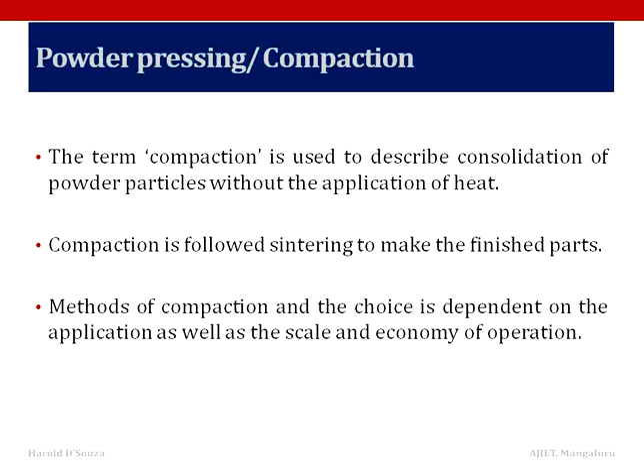Now, an alternative is to use low pressures and high binder content to shape the powder particles. The binder acts as a glue to hold the particles into the desired shape. Most binders are polymers, which might be mineral oil or polyethylene. In shaping, the porosity ranges from 40% to 60%, excluding the polymer.

Therefore, sintering is performed at temperatures where sufficient densification occurs. Fine powders assist in densification during sintering. Thus, key differences between compaction and shaping are in the forming pressure, initial porosity levels, particle sizes, and sintering temperatures. Compaction relies on high pressure and the resulting porosity is low, while in shaping it is the reverse.

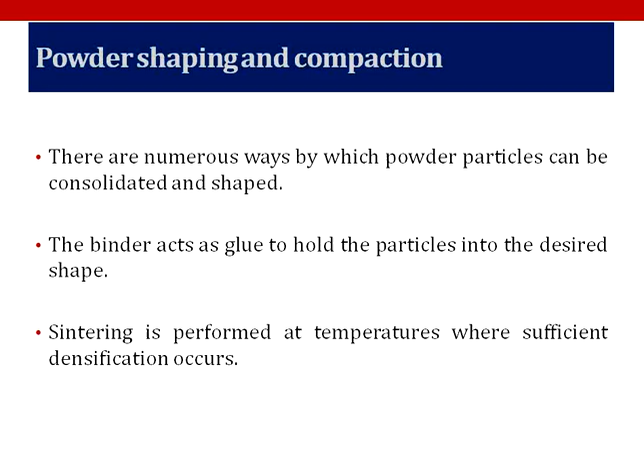The differences between the compaction and shaping technologies have an impact on the production costs. Important considerations are the component size, the desired final density, and shape complexity.

A general categorization of shaping technologies is as follows. Binder assisted extrusion: elongated parts, fine powders, constant cross section, relatively simple shapes. Second, injection molding: for complex or small components or high performance materials. Slip casting: for very large structures, constant wall thickness, and low precision. And tape casting, used for flat sheets, very simple shapes, and fine powders.

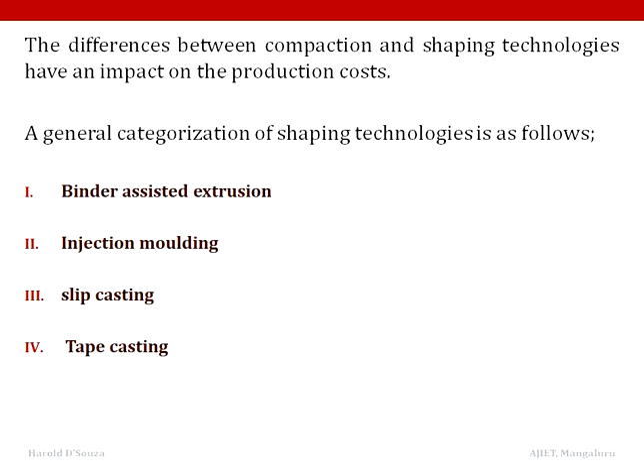Binders. A binder or binding agent is any material or substance that holds or draws other materials together to form a cohesive whole, mechanically, chemically, by adhesion or cohesion. The binder is mixed with the powder to form the feedstock. Most binders are multiple component mixtures that contain a major ingredient which provides the basic properties, along with additives used to obtain other desired properties.

As a primary requirement for easy shaping, the binder must wet the powder surface. Various chemicals are employed to improve the wetting between the powders and the binder. For ferrous alloys, the most common coupling chemicals are stearates, including stearic acid, zinc stearate, and ethylene bisstearamide. Of these, stearic acid is a low cost polar molecule having a density of 0.85 gram per centimeter cube and a melting temperature of 65 to 75 degrees centigrade.

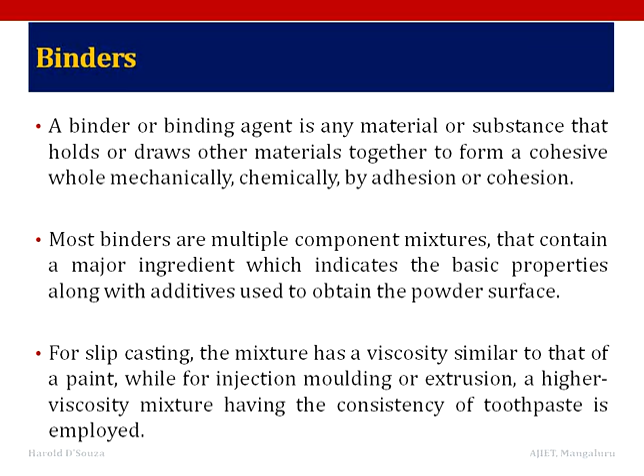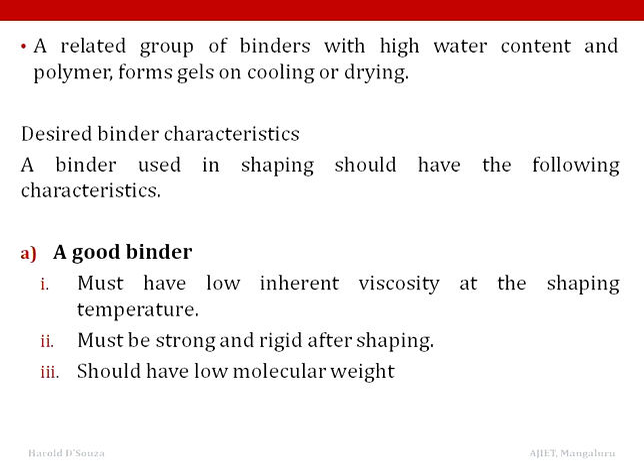The desired binder characteristics: a good binder must have a low inherent viscosity at the shaping temperature. It has to be strong and rigid after shaping, and it should also have a low molecular weight.

Second, powder interaction. With regard to powder interaction, a binder must wet and adhere to the powder. It has to be chemically passive and stable during mixing and shaping.

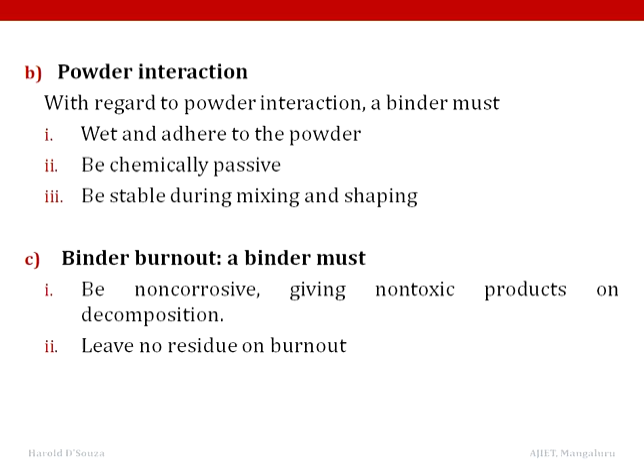And binder burnout: a binder must be non-corrosive, giving non-toxic products on decomposition, and it should leave no residue on burnout.

Compacting. The blended powders are pressed in dies under high pressure to form them into the required shape. The work part after compaction is called a green compact, or simply a green. The word green means not yet fully processed. Compaction is done to bring the finely divided particles of the powder into close proximity while imparting the desired part configuration.

The following methods are used or adopted for compacting: die pressing, centrifugal compacting, injection molding, extrusion, rolling, gravity sintering, slip casting, isostatic molding, and explosive molding.

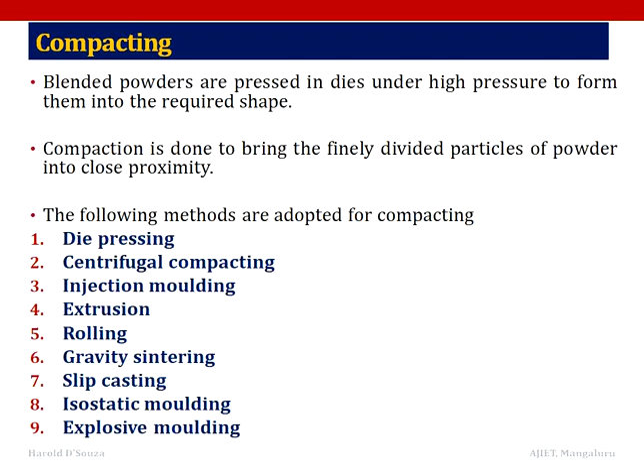Die pressing: the metal powders are placed in a die cavity and compressed to form a component shaped to the contour of the die. The pressure used for producing the green compact of the component varies from 80 megapascals to around 1400 megapascals.

Depending upon the material and characteristics of the powder used, mechanical presses are used for compacting objects at low pressure, while hydraulic presses are used for compacting objects at higher pressure.

The basic components are: the hydraulic mechanism, to apply the pressure; a die which has adequate strength with a cavity of the desired shape and dimension; a feeding device to fill the die cavity; the upper and lower punches to apply the pressure and assist in ejection of the green compact; and a control system to maintain the magnitude of pressure and the rate of pressure application.

Single action die compaction is used to manufacture flat thin parts such as washers, discs, and thin rings. The lower punch is stationary during the application of pressure by motion of the upper punch, acting from one direction only on the powder placed in the cavity.

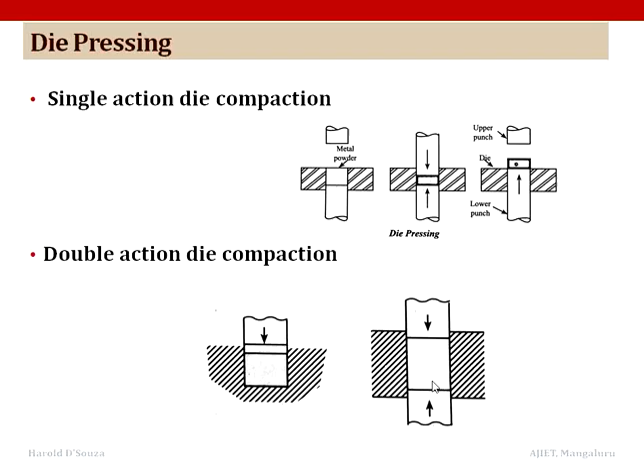Next, double action die compaction: here the powder is compacted simultaneously from opposite directions by both the top and bottom punches. Equal or different amounts of pressure may be employed from each direction. The die table remains stationary, and the upward movement of the lower punch ejects the part out. This technique can be used for manufacturing thin walled bushings and cylindrical bearings.

Centrifugal compacting: here the powder is swirled in the mold and packed uniformly with pressure up to 3 megapascals. The uniform density is obtained as a result of centrifugal force acting on each particle.

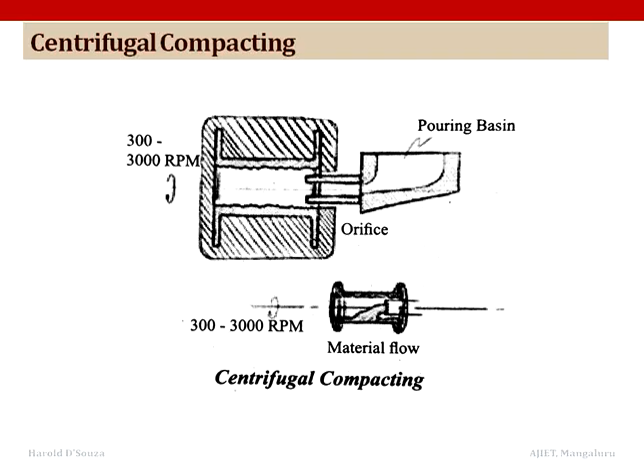This method is employed for heavy metals such as tungsten carbide and for materials that are relatively incompressible by conventional die compaction. The main drawback of this process is that it is relatively slower because it takes a larger time for the fluid to be absorbed.

Rolling. This method is used for making continuous strips and rods having a controlled porosity with uniform mechanical properties. In this method, the metal powder is fed between two rolls which compress and interlock the powder particles to form a sheet of sufficient strength. It is then re-rolled and heat treated if necessary. The metals that can be rolled are copper, brass, bronze, nickel and stainless steel.

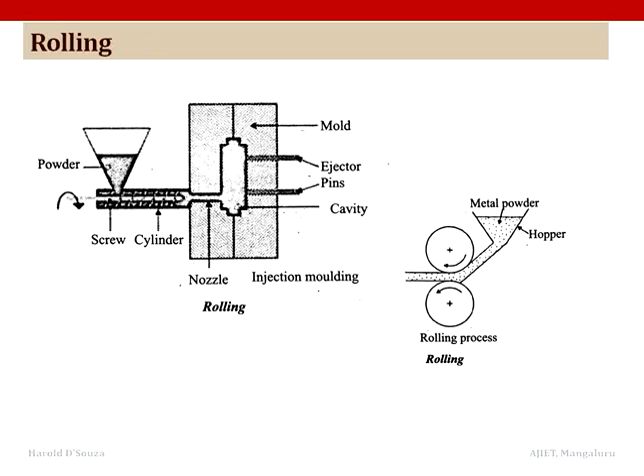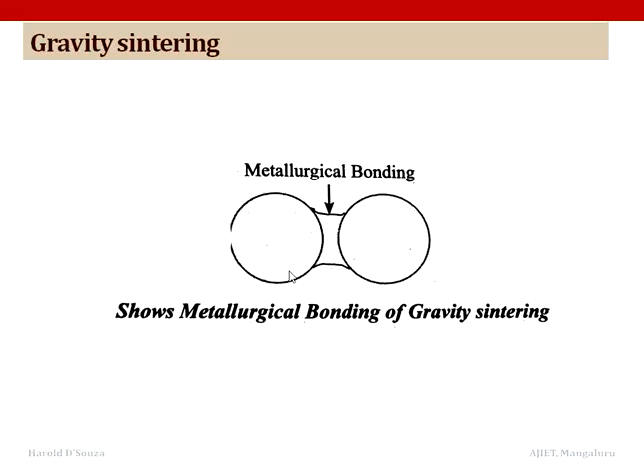Gravity sintering. Gravity or loose powder sintering is used to make porous metal parts from powders that diffusion bond easily, where most production parts are generally made from bronze. In this process, no outside pressure is applied to shape the part. The appropriate material graded for size is poured into a mold cavity, which is void in the shape of the finished part. These metal particles are then heated to their sintering temperature, at which point metallurgical bonding takes place and joining necks are formed at the contact points.

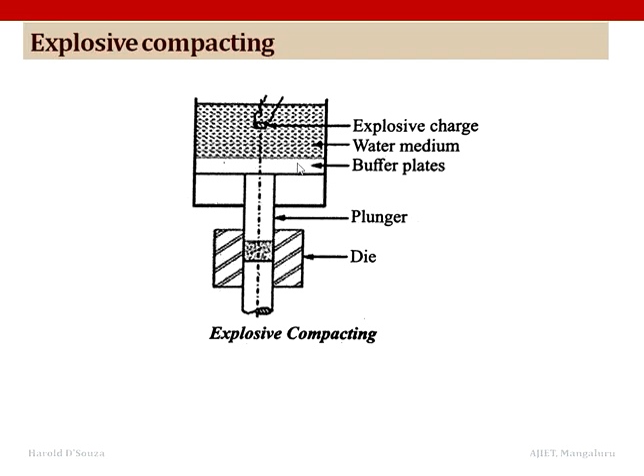Explosive compacting. In this method, the pressure generated by an explosive is used to compact the metal powder. Metal powder is placed in waterproof bags which are immersed in a water container cylinder of high wall thickness. Due to the sudden detonation of the charge at the end of the cylinder, the pressure of the cylinder increases. This pressure is used to press the metal powder to form the green compact.

Cold isostatic pressing. In this method, the powdered material is contained in a tightly sealed flexible mold which is subjected to uniform pressure around 65 to 650 megapascal, applied simultaneously from all sides, achieving uniform density and strength. After pressing, the compact is removed from the chamber. The pressure transmitting medium used is a liquid such as a water or oil mixture.

The powder is loaded in a shaped flexible envelope for the production of the desired shape of the pressed part and tightly sealed against leakage. The flexible envelope is usually made from natural rubber, synthetic rubber, plastics, or thin metal foils. Isostatic pressing is generally used to produce large powder metallurgy parts to near net shape.

Now, the flexible mold should possess the following characteristics: it must be completely impervious to the pressurizing fluid, it must be easily sealed, and it must be rigid enough to withstand the internal pressure.

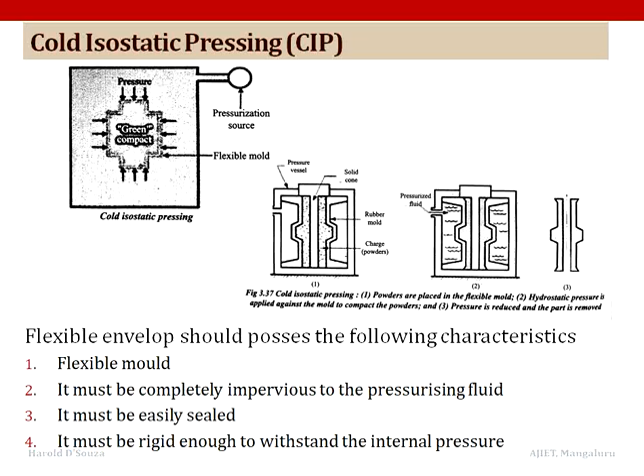The advantages of cold isostatic pressing are a uniform and high density compact. It produces high dimensional accuracy, that is a near net shaped product, and better mechanical properties like ductility, strength, hardness. Also, more complex geometrical shapes can be produced. It has a higher green strength, also the absence of lubricant and reduced friction.

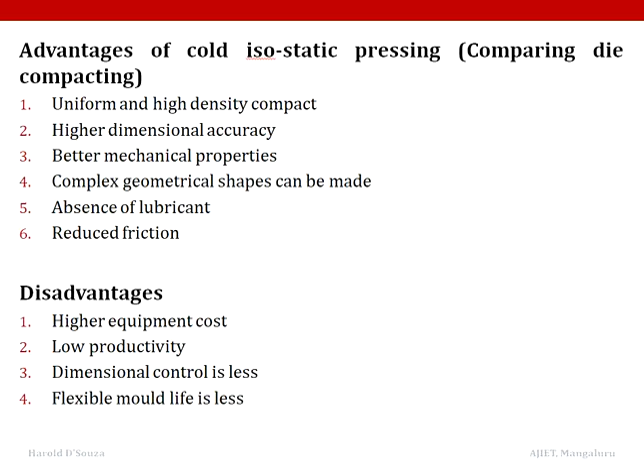Apart from this, the disadvantages are the higher equipment cost, the productivity is low with this method, and the dimensional control is comparatively lesser than other methods, and also the flexible mold life is less. The applications of isostatic pressing are that it is widely used in aviation, defense, medical equipment, and also to produce cutting tools, automotive cylinder liners, corrosion resistance components, etc.

Hot isostatic pressing. Hot isostatic pressing is a compacting process where high temperature and pressure are applied simultaneously in three dimensions to produce a dense component. The pressure is uniform in all directions, so isostatic. At higher temperatures, the heated container deforms plastically and the powder is compacted within it under pressure, so no further sintering process is needed, as the combination of heat and pressure is done during the process.

Metal or glass is used for making the hermetic container. The pressurizing medium is argon or helium with a pressure of 100 to 200 megapascal and a temperature of 2200 degree centigrade. Hot isostatic pressing is a combination where the compaction and the sintering process in the powder metallurgy production happens together. Also, it eliminates the separate sintering.

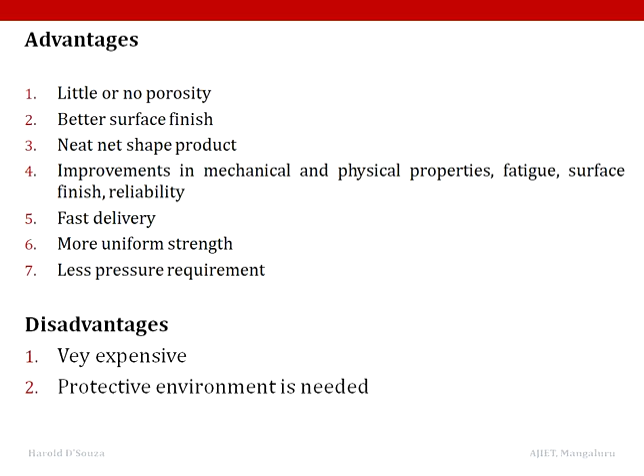The advantages are it has little or nil porosity, a better surface finish, and attains a net shaped product. Also improvements in the mechanical and physical properties, fatigue, surface finish, and reliability. It also provides faster delivery and uniform strength with less pressure requirement. But the disadvantage with this method is that it is very expensive and a protective environment is needed.

Apart from this, we have injection molding, which is also a method of compaction of the ceramic powder, fed and injected into a mold cavity by means of a screw rotating in a cylinder. This method is similar to plastic injection molding.

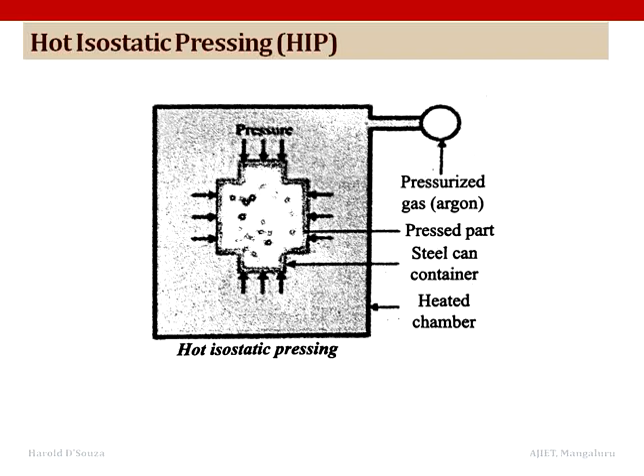Extrusion is a procedure of metal powder compaction or semi-products manufactured by pre-pressing or possibly by pre-sintering into continuous strands. The process can be carried out at normal or elevated temperature, or the sintering temperature. In the case of extrusion pressing at normal temperature, a mixture of powder and a plastificator is pressed through a nozzle into rods or tubular forms.

These are cemented carbides, high temperature materials with high hardness, and especially technical ceramics. A pressing mixture contains 20 to 30% of the plastificator, which has to be removed prior to the actual sintering. The compacting pressure is performed using a piston or a screw.

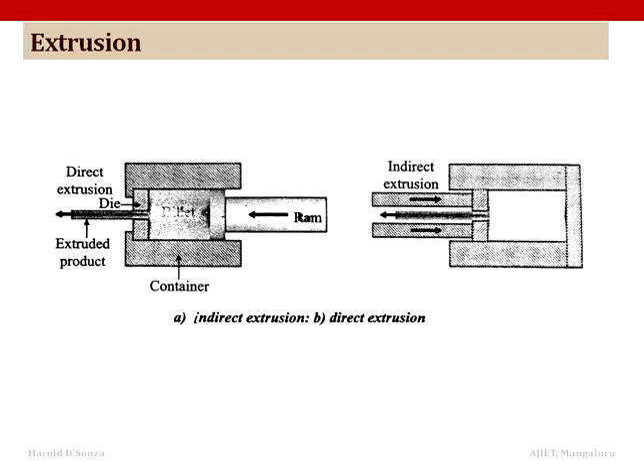Slip casting is frequently used for compacting metal and ceramic powders to make large and complex shapes, as well as for limited production runs. A slip is a suspension of a metal or ceramic powder, around finer than 5 micrometers, in water or other suitable liquid, which is poured into an absorbent mold, usually plaster of Paris, dried and subsequently sintered.

Slips are usually made up of the constituent powders, a dispersing agent to stabilize the powder against colloidal forces, a solvent to control the slip viscosity and facilitate casting, a binder for giving green strength to the cast shape, and plasticizers to modify the properties of the binder. These ingredients interact, especially in their competition for binding sites on the powder surface. For this reason, the order of addition of components and their mixing time are also important variables.

In making the slip, the formation of an appropriate and consistent slip is important for successful slip casting. This is usually achieved by maintaining proper control of particle size and size distribution, and the addition of proper deflocculants which prevent the settling and aggregation of powder particles and maintain the desirable viscosity of the slip.

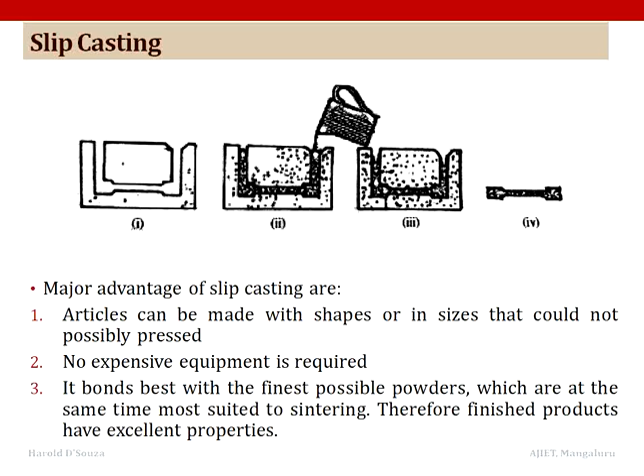This process consists of preparing a dispersion of the metal or ceramic powder in a suitable solvent with addition of a dispersing agent to improve the dispersion of particles. After a satisfactory dispersion is achieved, a binder is added and the whole mixture is fed into the reservoir.

The slurry is then fed onto a moving carrier film from the bottom of the reservoir. A powder slurry layer is deposited on the carrier film by the shearing action of the doctor blade. It is important that the slurry be free from air bubbles, as these may lead to porosity in the strips, affecting the properties.

During sintering, the binder is burnt off first, and as the temperature increases, densification of the material occurs. Present day units use an endless steel belt instead of a carrier tape. This process can be used to produce very thin tapes, between 50 to 1000 micrometers thick.